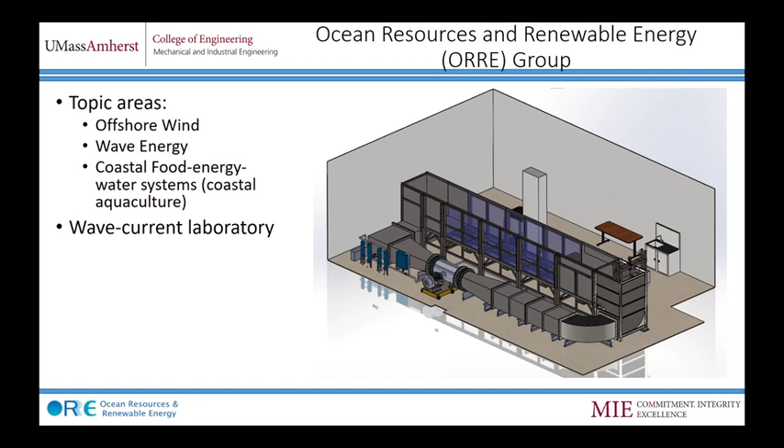A lot of my effort these days is in building this wave current laboratory, which is not as large as the Chase facility. It's about an 11-meter length facility, but we are very keen on developing a good understanding of waves and currents, and we see that as the next big challenge with marine hydrokinetic systems.

So that's kind of the layout, as you can see there's some dimensions there. It's about 1 meter by 1.2 meters wide, with an operating water depth of 1 meter. We want to equip it with photography and PIV systems, and we also have people on our team interested in numerical simulation.

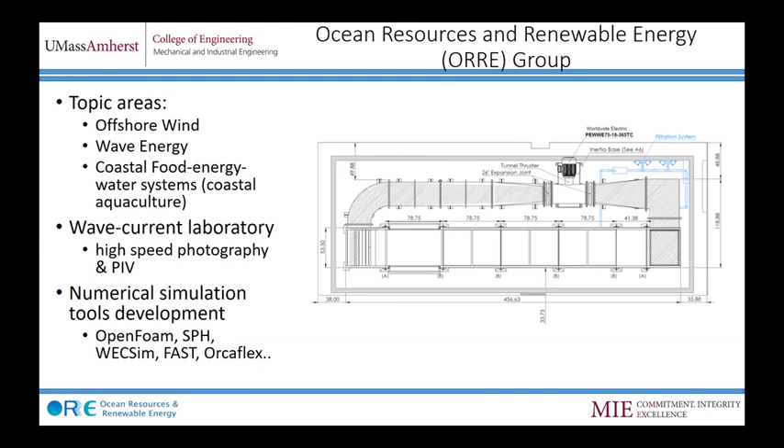So all of this we hope will come and support us in the three areas we're working on. Some of the topics we work on in offshore wind: our recent research has focused on how the platform behaves in the environment—what sort of loads, both wind loads and wave and hydrodynamic loads, are imposed on the platform, how to simulate these extreme environments, what flow-induced vibrations we might encounter, and of course mooring systems, which is a real thorny issue for the emerging floating offshore wind area.

Interestingly enough, even though I'm part of the Wind Energy Center there, most of my funded work is actually in wave energy. As you see here, some of our projects with the National Renewable Energy Labs involve this flap-type wave maker wave energy system, and we did some tests in Maine on this device.

The novelty of it is it has little shutters you can open and close, and the idea is you can shed loads during the most extreme conditions. Now we're working with NREL on a system that's not bottom-mounted but slightly lifted from the bottom, and as you can see in this picture, it's a little tower sitting on top of that. We hope to be able to test it in our new facility at UMass.

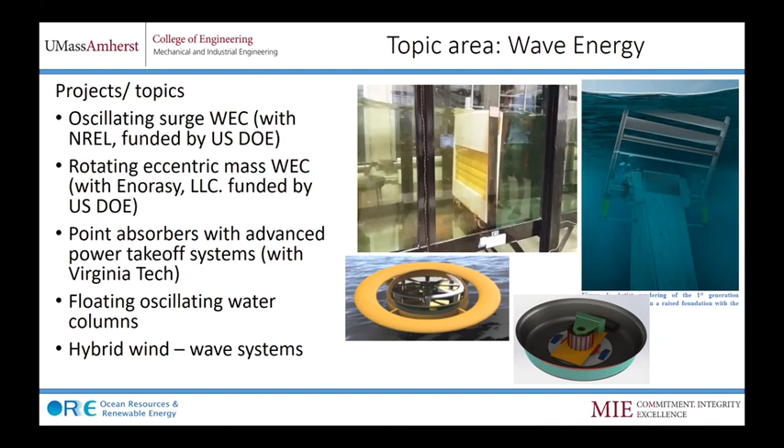We have also, in the past, worked with Virginia Tech on some of their point absorber ideas, and I have a personal interest in oscillating water columns, having worked with them since my time in Australia, recently looking at floating oscillating water column systems. There's also interest in seeing how hybrid wind and waves can come together—can wave energy and wind energy coexist, and if so, how can it be made economical?

The food, energy, water nexus and the aquaculture idea have very strong social implications. As many of you can understand, our engineering solutions these days should be socially sustainable—social engineering combined with technical engineering, if you will.

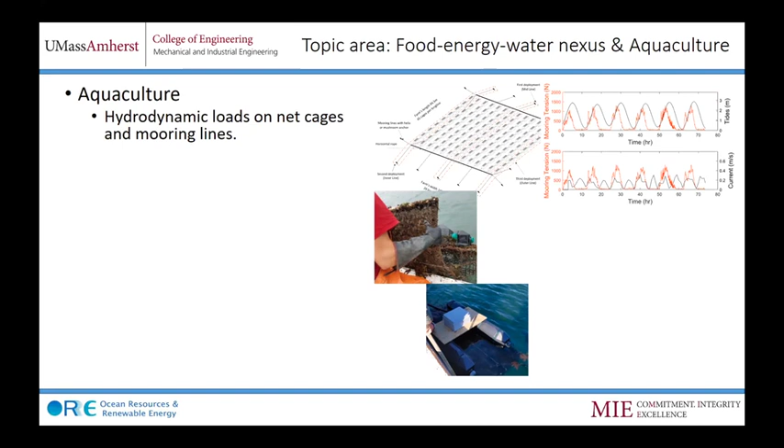So aquaculture systems have a very community-focused aspect to them. Our engineering is looking at how we can ensure safety of aquaculture infrastructure, and in particular we are interested in mooring systems and the ropes they use.

I have also extended support to the ARPA-E programs when they did the large-scale macroalgae production, and I know UNH is involved in it in a very big way in the Mariner projects.

We also have a student who was working on better prediction models using SPH, smoothed particle hydrodynamics. Let's see if I can get my mouse to work. Actually, like this one. Let's see if I can do this.

So these are SPH simulations of objects moving in water. The idea is to see if we can come up with better mooring line models that can also be integrated into this simulation. I'll touch upon this towards the end of the talk, on some of the viscoelastic and viscoplastic modeling of synthetic mooring lines and how we are working on developing that.

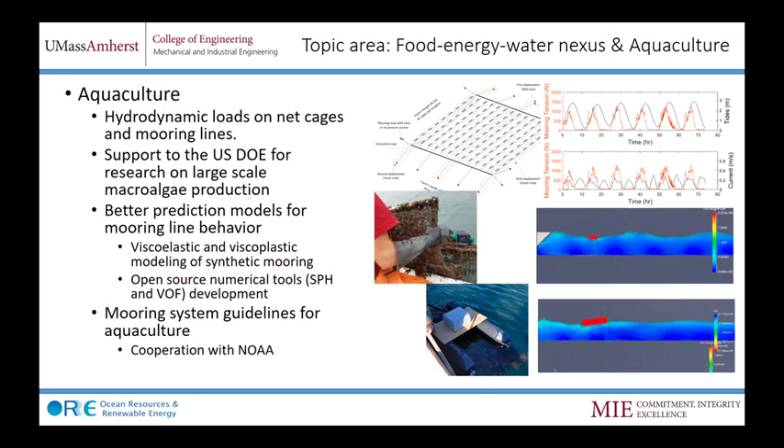Also did some supporting work for NOAA for their mooring system guideline development.

A couple of things I'll mention in the service area: I also contribute to the ASME's Ocean Offshore Arctic Engineering Conference, and I'm the coordinator of the Renewable Energy Symposium, the OMAE conference that happens every year. We also have a new conference on offshore wind, called the International Offshore Wind Technical Conference, and the next one, in 2020, is going to be in Boston, end of October this year. So an open invitation for anyone interested.

Okay, so I want to start. I have two parts, and I'm going to see how much justice I can do to both of these parts in the limited time. I'll start with part one, which is focused a little bit on the oil and gas side, but it also kind of leads you into what are the challenges we are facing with the floating offshore wind side.

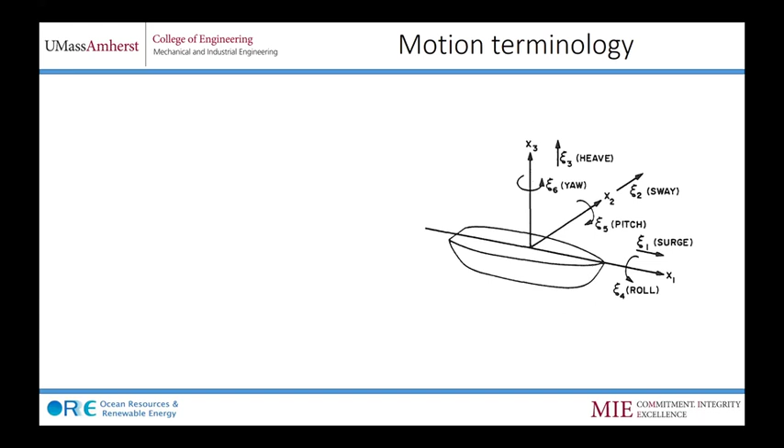Just to get everyone on the same page, when we talk about how moorings influence a platform motion, in conventional naval architecture we have the vertical plane motions: heave, pitch, and roll, and you can see how those motions come about in that diagram there. The vertical plane motions are called seakeeping motions in naval architecture, and in offshore engineering we call them global performance.

And then the other three motions are called the horizontal plane, which is surge, sway, and yaw. In ships which are moving forward, these become the maneuvering aspects and the maneuvering parts. And in moored systems, these are called the station keeping behavior or performance.

So conventionally we have separated these two motions because they are also segregated from a spectral standpoint. In terms of frequency, the range of frequencies, these two motions are separated — that's the way they occur naturally. And the mooring systems are primarily designed to work in the lower three motions.

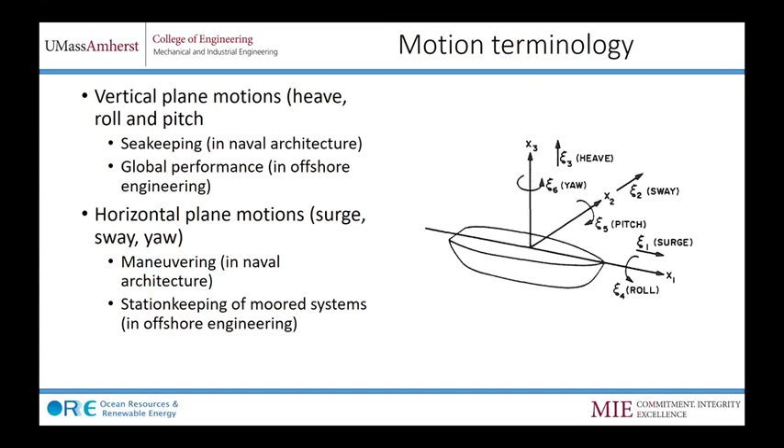And that kind of gives certain unique advantages. The principal advantage being the horizontal plane loads that are influencing a mooring system are much smaller in magnitude compared to the vertical plane loads. And so you can get away with a smaller mooring system, a thinner line, and make the system robust and ensure its station keeping ability. So let's keep that in mind, and then we'll see how the progressive use of mooring systems actually allows the moorings to move into all these motions, and that's where a lot of challenges arise.

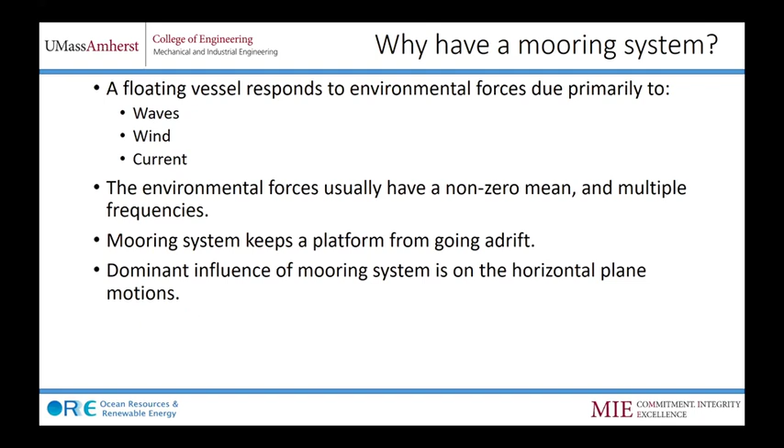So why even have a mooring system? We have all these mean forces hitting on a floating vessel, and if you do not have a mooring system, then the platform is going to keep moving. So the mooring system keeps the platform from going adrift, and the dominant influence is on the horizontal plane motions.

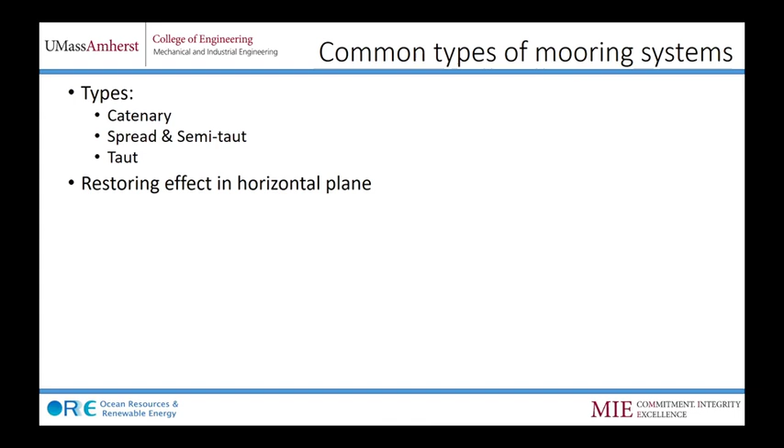So these are the three common types of mooring systems that we see in the industry: the catenary system, the spread system, and the taut system. In the catenary system, the way the restoring effect works is basically by a change in configuration, which is what gives you the restoring effect. But it's also quite heavy.

The spread mooring system is a combination of different types of material. This is an example of a polyester system used in an oil and gas installation. What we have is a chain at the top, and then you have a wire, which could be polyester, or it could be a synthetic rope or a wire, and then you have a chain at the bottom.

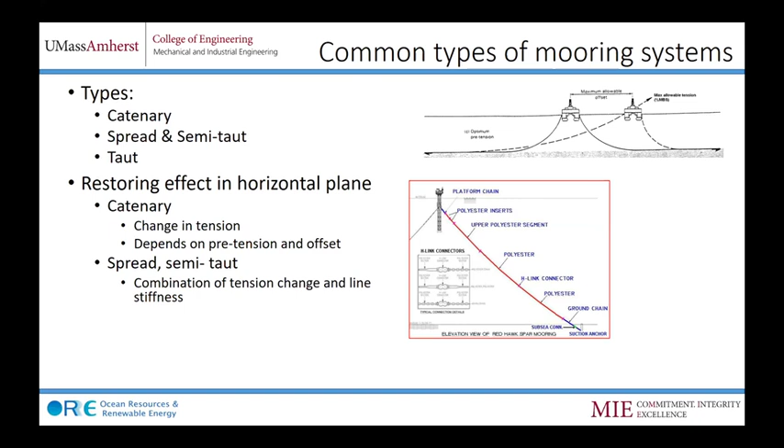So with the semi-taut system or the spread system, there is a combination of tension in the line and the line stiffness together — they provide the restoring effect.

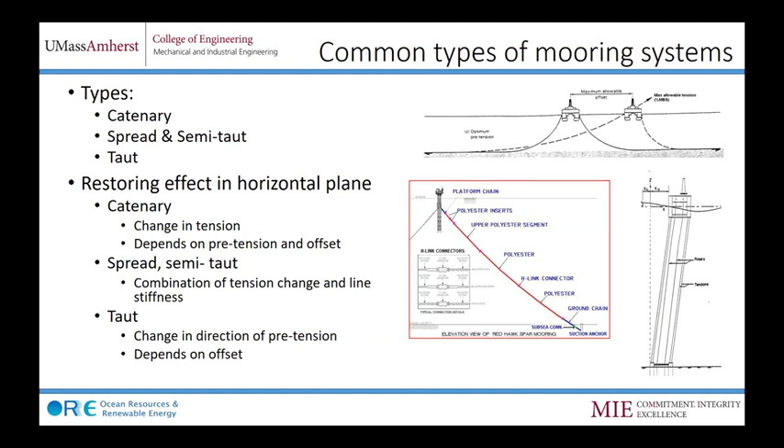In the case of a purely taut system, like the tethers of a tension leg platform, basically the platform moves, and it's the change in direction of the pretension in the line which provides the restoring effect. So when we move from the catenary system to this type of system, we have an uplifting effect on the anchoring system. You've got to come up with better anchoring and foundation arrangements for the semi-taut and taut systems. The foundation takes on a much bigger role, and becomes more expensive compared to the catenary system, where you can get away with a little drag anchor, which is one of the cheapest ways of doing it.

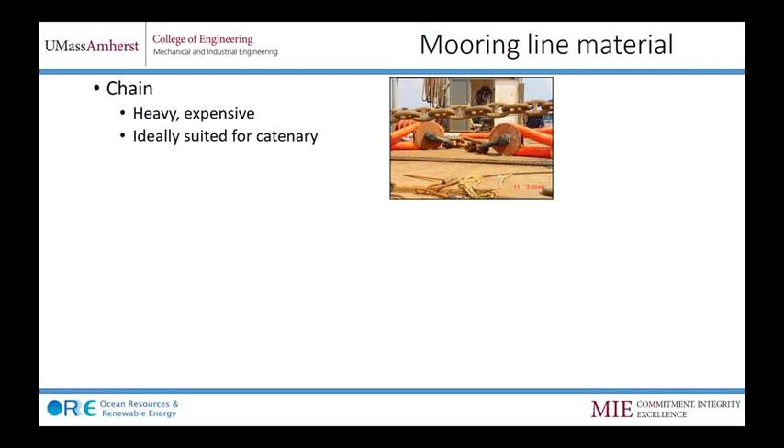In terms of mooring line material, chains are the most common and very traditional, with well laid out, commonly available handling systems. But they are heavy, and only ideally suited for the catenary type arrangement. Then you have the steel wire system, a stranded cable arrangement, or synthetic rope, which is a braided structure. What we're finding is the viscoelastic and viscoplastic nature of the synthetic rope can make a big difference in the way the rope behaves.

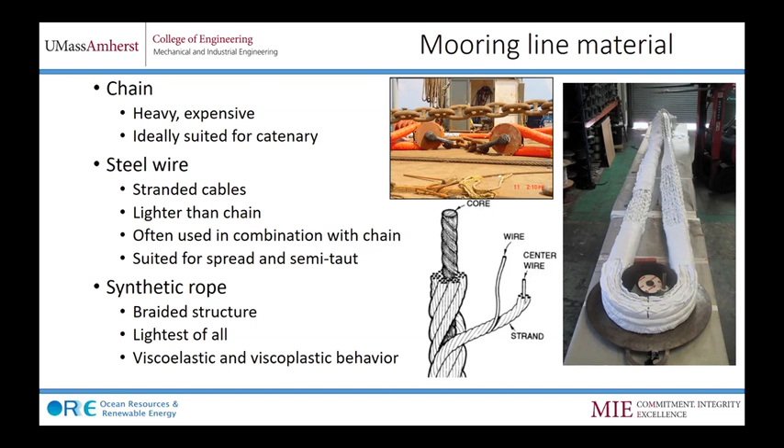I want to initially talk about a very interesting problem, research we did over the past 10, 15 years, looking at the station keeping of a turret moored FPSO, a floating production, storage, and offloading system. Here, the mooring line is a very conventional arrangement where we know how the system works, and it's basically in the station keeping domain. You will see no influence of the sea keeping aspects, the vertical plane aspects. And here we came across a very interesting instability problem, which I'll show some slides on.

For those who are not aware, FPSOs are, as the name implies, remotely operated production systems where whatever is produced is processed on board the vessel, and the hull has a number of tanks where the produced fluids are stored and offloaded every few days when a shuttle tanker comes in. Many of these vessels have an internal turret arrangement, something like what you see in the picture here, and all the mooring lines attach into the turret. So the vessel itself can freely weather vane about this single point arrangement. In offshore Australia, there are a number of these vessels because the fields are a little remote, and having pipelines to bring the produced fluid to shore is simply not possible. So having FPSOs is really a very economical option.

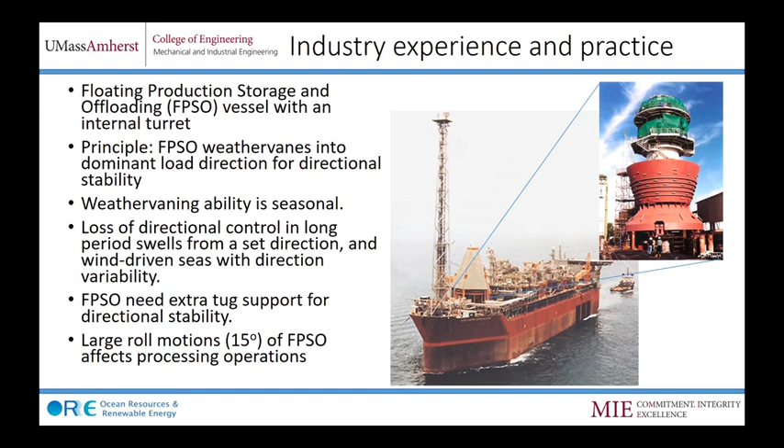But what we found, from anecdotal evidence from operators, is the vessel very rarely stays in the weather vaning position. If there is head sea coming in, the vessel is supposed to align itself in the direction of the waves. But instead, when the sea turns direction, the vessel will simply turn itself so that it's always aligned - at least that's the idea. But what people found was oftentimes FPSOs need extra tug support because it seems to align itself at an angle with respect to the oncoming waves, resulting in very large roll motions, consequently affecting processing operations and so on. So we did a research project in good collaboration with the Institute of Ocean Technology in St. John's, Newfoundland, Canada.

While the video is running, I'll talk about this experiment we did. We built a model FPSO, basically a converted VLCC, and put mooring lines at a turret. We put a turret in there, a turntable, put some mooring lines, and then wanted to first test it in regular waves, just to understand its response amplitude behavior. Surprisingly, what we found is what you're going to see in the video.

We later tested it in random waves. There were no winds, no currents. We had 4 mooring lines, instrumented them, and you can see something happening. The waves are coming from right to left, and the vessel is not aligning itself in the direction of the waves. It's invariably turning, and it seemed to be very comfortably located at some angle. In this particular case, the angle is about 35 degrees with respect to the oncoming waves. So clearly, it's taking waves beam on or in a quartering condition, resulting in roll motions, creating all sorts of interesting complications. It also complicated our experiments because if the vessel would not stay in one place, we cannot get the response behavior, because the response depends on the angle.

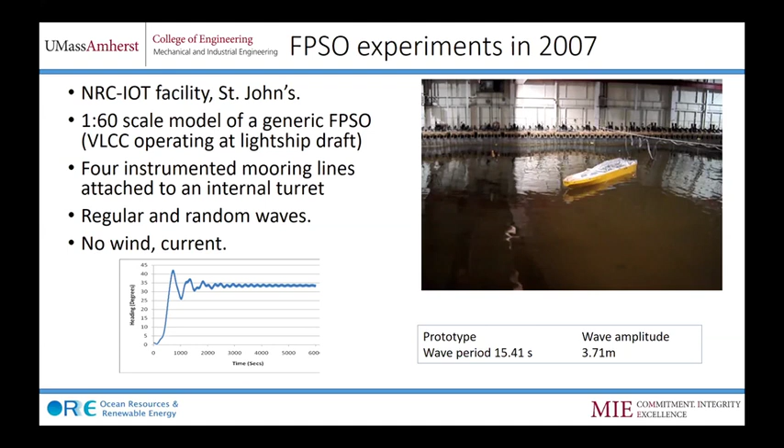So we set about trying to understand why this is happening, and then we came across this. We started hypothesizing, and then what we saw was this heading instability, and this is directly a consequence of two types of drift loads. These are small forces from the waves happening at the station keeping range, very low frequency, with mean loads creating a low frequency motion.

So these are just mean forces and non-linear mean forces. One of them creates a moment about the turret, another a mean force acting on the hull, and these two have counteracting moments. The angle at which the hull settles is simply given by the point where these moments come to equilibrium, and the moment obviously depends on the angle at which the hull is located.

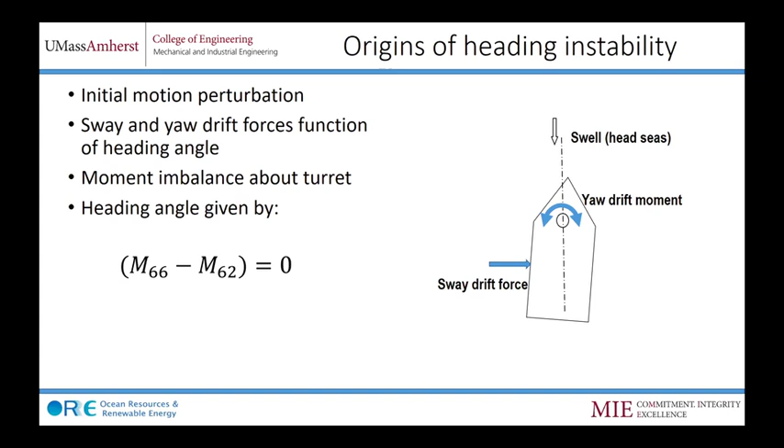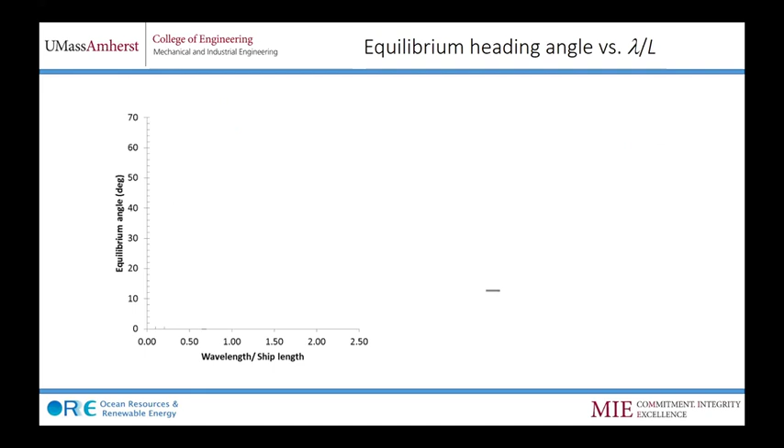So we also did some numerical simulation of this work. It turned out to be a PhD thesis of one of my students. And what we found is if you look at how the equilibrium angle in the y-axis changes with the frequency or the wavelength of the waves, we found something very interesting.

Up to a certain point, we don't see any changes. The equilibrium angle is 0, which is what we want - we want the hull facing the waves, so that's zero equilibrium. At a certain wavelength, when the wavelength to ship length ratio is around 0.5 or so, the experimental data showed this equilibrium angle was changing, and like what we saw in the video, the equilibrium angle was around 30 to 35 degrees. It started changing up to a certain wavelength, then it flattened out, and then it reduced.

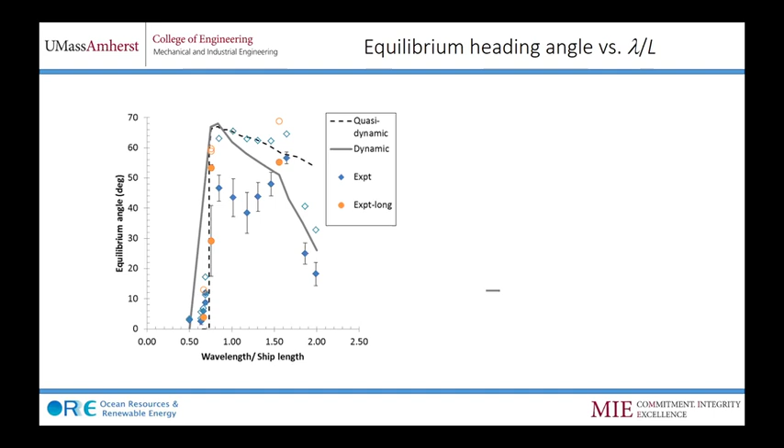We saw the same thing when we did our numerical simulations. We did both frequency domain analysis and time domain analysis, and our curves also predicted very similar behavior to what we saw in the experiment. So in one of our papers, we talk about a bifurcation in the equilibrium that results in this behavior, and we studied how this happens and why it happens, and so on.

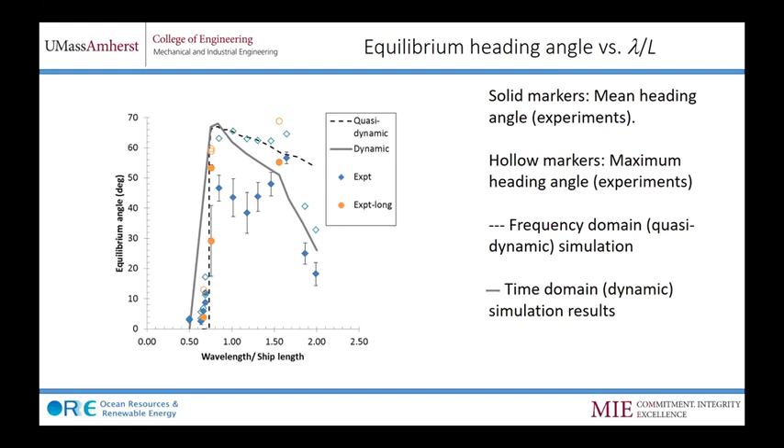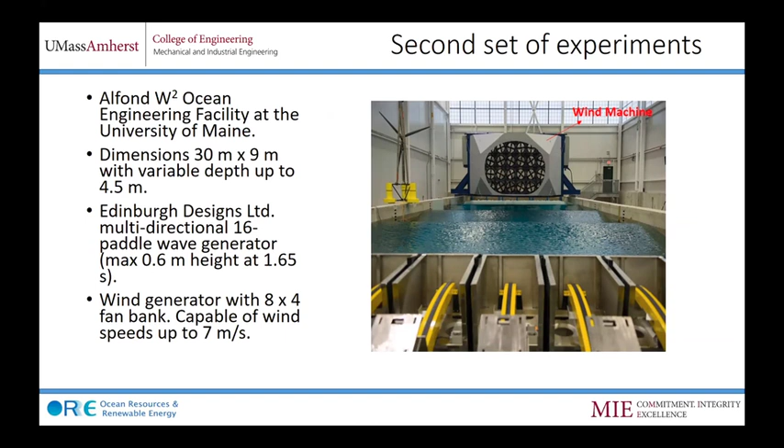So when I moved to Maine, we looked at doing another set of experiments with a similar FPSO model. I helped build a facility at the University of Maine, which is this wind wave facility. The wave tank is about 30 meters long, 9 meters wide, 4.5 meters water depth. We had wave makers on one side and a beach on the other end, and we had this wind machine, capable of producing quite large wind speeds.

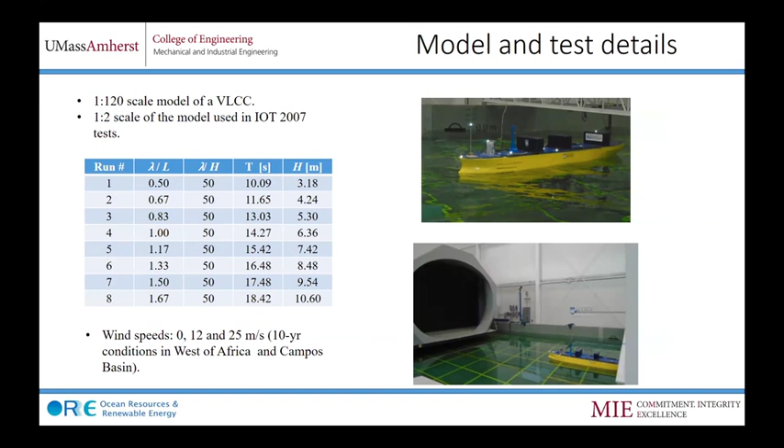We built a little FPSO model, a replica of what we tested in Canada several years back, and subjected it to multiple environmental conditions, including regular waves with wind speeds, as well as bidirectional waves. What we found was very reinforcing of what we saw in Canada. We used very similar mooring systems - lines with springs that matched the reaction force or stiffness from the actual mooring system. We have a little turntable turret for the hull.

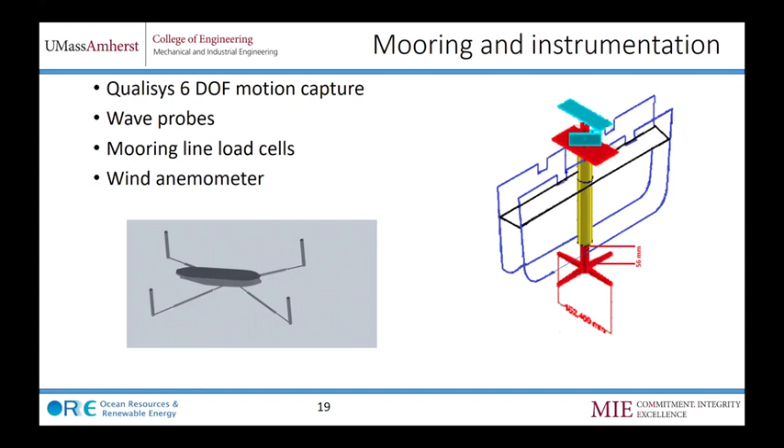What we found in that case is the heading angle versus the wavelength to ship length ratio had a very similar behavior to what we saw in Canada. The no-wind case matched with the experiments from before, and when we added wind speeds, this heading angle also changed. Presumably the wind speed adds another moment to the equilibrium, and consequently that affects it. All this was published in a couple of papers.

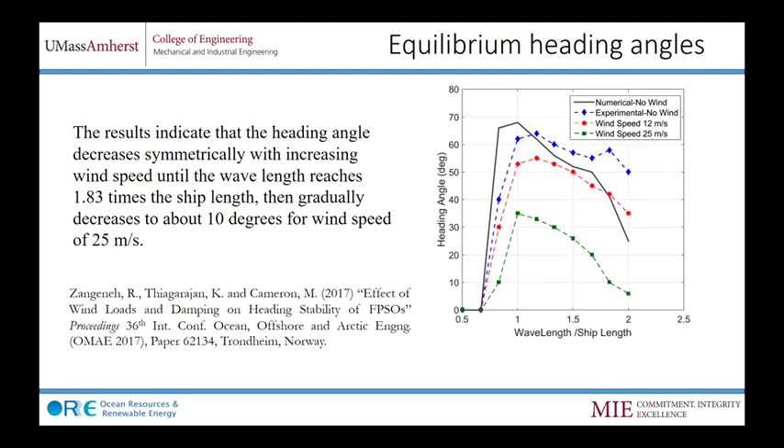Then we posed the question: what would happen if an FPSO like this were to be in an environmental condition which has both waves and swell? So it's a bidirectional sea state, very commonly seen around the world. In Australia, they have swells coming from the Southern Ocean interacting with the wind sea, which is a local phenomenon. You see this sort of bidirectional condition in Brazil as well.

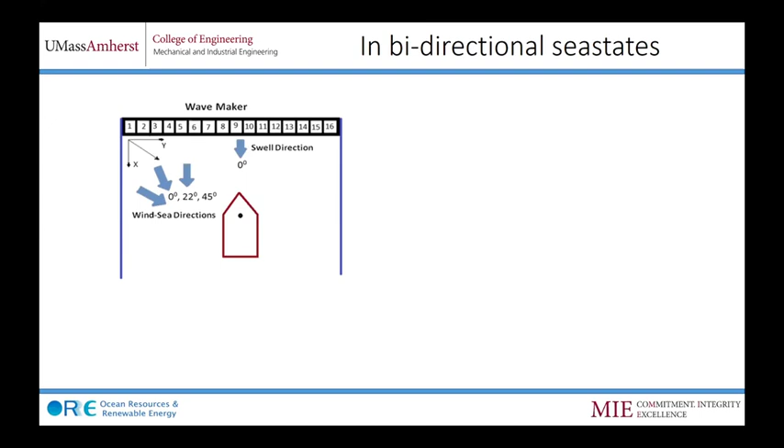Bidirectionality is defined as when the swell, which is more predictable, comes from a certain direction, and then the wind sea, which is a locally generated condition, can change direction relative to the swell. So we assumed our FPSO is operating in one of these conditions, oriented in the direction of swell, and then when the wind sea is applied, what sort of movement will this platform have? Will it weather vane in the swell direction, or change towards the wind sea, or what will it do? And what we found was something very interesting.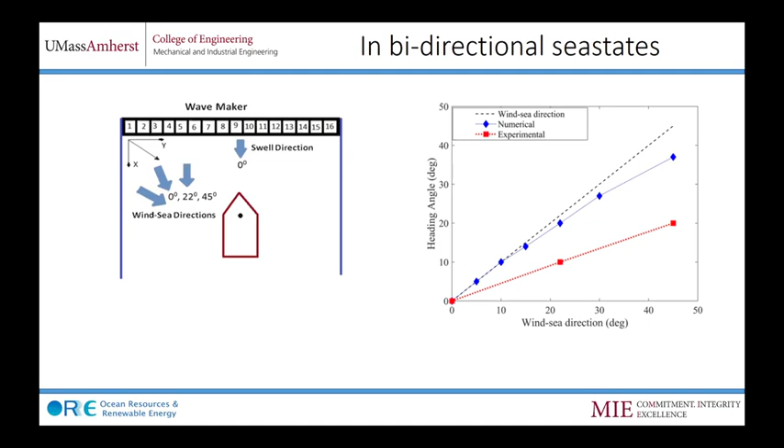So it's in between the swell and the wind sea, kind of aligning itself somewhere there. Whereas our numerical simulations showed that the vessel should orient itself in the direction of the wind sea. So there was clearly a very large discrepancy between what we are seeing in the numerical simulations versus what we are seeing in the experiments.

And then we said, okay, what can we do? What we started understanding was, when you have two wave systems coming in two different directions, you have the wave numbers of these two, and wave number is a vector, right? So you look at the difference between the two vectors as well.

The second order potential of this combined wave system creates something called a bound wave. And this bound wave actually has a wave number which exactly matches this difference vector between the two wave number vectors. So when we do simulation with bidirectional sea states, we don't just input the two sea states, we actually have to input a third component of the sea state, which is this bound wave.

Previously, when we did simulation, we only had the swell and the sea. That's typical of simulations we would do in the industry. Now, what's often ignored is this component, the bound wave given by the difference between these two.

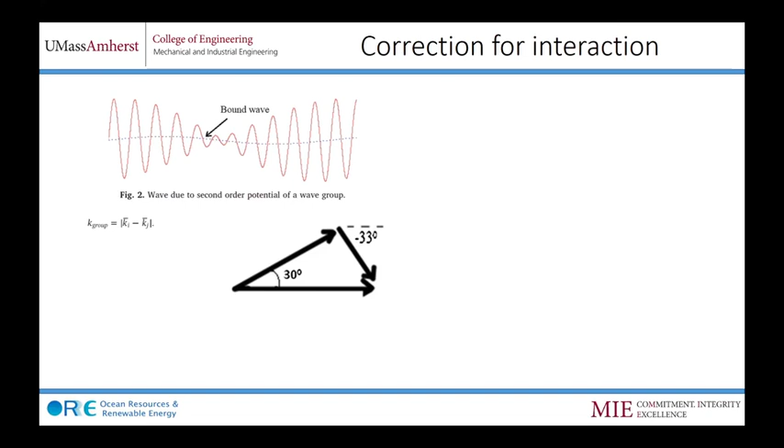So once we add this third component and then do our simulation, what we find is, lo and behold, our simulations match very well with the experiment. If you need more details, you can look at our paper in Applied Ocean Research from 2018.

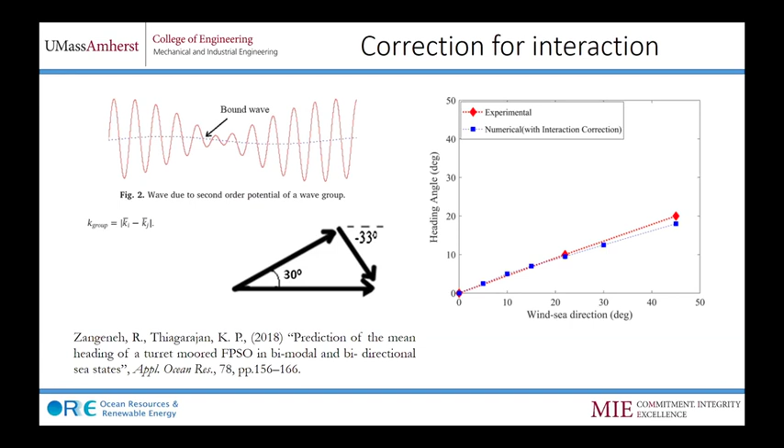So in part one of my talk, what I've shown is how the conventional mooring system has been designed, deployed, tested, and how it contributed mainly to the horizontal plane motions. And what we were talking about is yaw motion, yaw instability, and equilibrium of a vessel in yaw motion.

Now, what we have been seeing in the industry is, as we have progressively been moving into more challenging mooring arrangements, we are finding more and more failures in the mooring systems.

Recently I've been looking at some literature where people have documented failures among floating installations in the Gulf of Mexico. There's been quite a few among the reported failures, some of them requiring a shutdown of the installation and of the production.

It results in a very high probability of failure, an annual probability of around 0.3%, which is quite considerable and significant. So when you do mooring designs, you really think about a very low probability of failure, and having large reported failures kind of results in people thinking whether the standards, guidelines, and design practice we have are adequate enough.

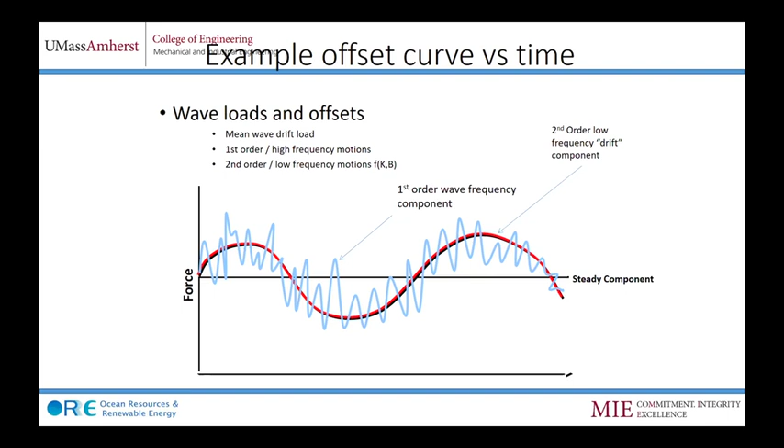But when we get into floating offshore wind turbines, we are moving into shallower waters. The platforms have lighter displacement. That results in some complications. And we are also customizing technology quite rapidly, which is a social aspect of this problem.

What we together see is mooring is affected by wave frequency. And so when the mooring is also moving and the platform is moving, you could end up at points where something called a slack-snap phenomena occurs, which is basically a shock load that can also transmit. So mooring lines are now affected not only by wave frequency motions, we can also see shock loads that could occur in these mooring lines when applied to offshore wind turbines.

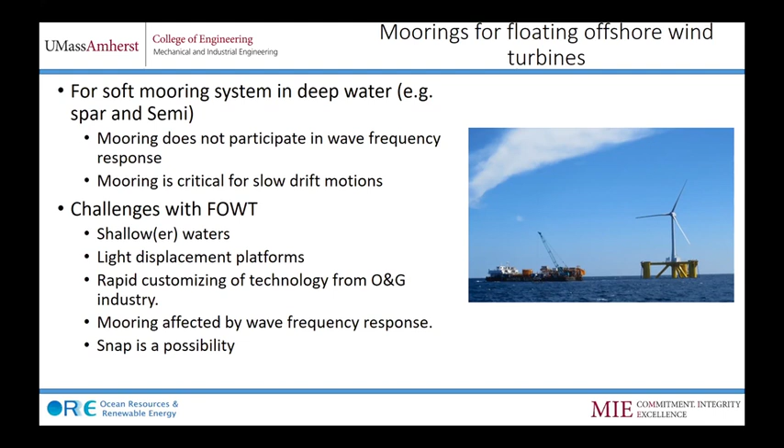To investigate whether this is true, we resorted to an experimental data set, which was a DOE-funded research program conducted by the University of Maine and a consortium. They tested three generic platforms: a spar, a 3-column semi-submersible, and a tension leg platform, all carrying the same wind turbine. This was tested at the Marin facility in the Netherlands.

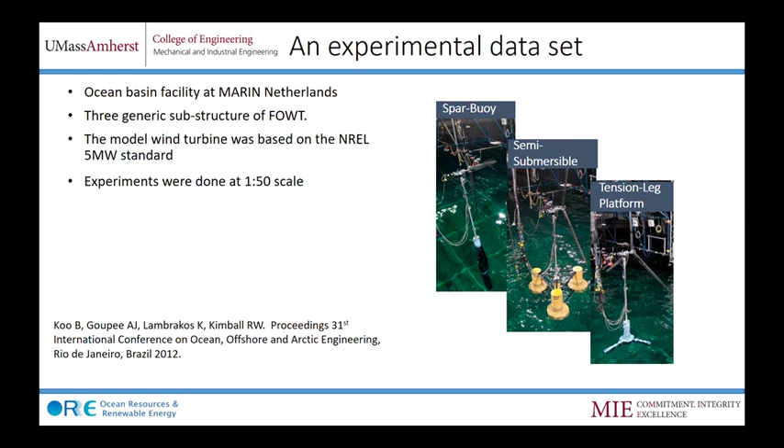So it's a 1/50th scale experiment, and a number of papers have been published on this data set. What we did is take the data for the semi-submersible, and we were looking at the 3 mooring lines for the semi, and we wanted to see what sort of tension variation we get. What you see here is a numerical simulation in Orcaflex, but what I'm going to show you in this talk is basically experimental data sets.

In the experiments, they had mooring lines, which are basically steel wires with little springs at the end to get the right tension-offset curve to match with the prototype. This wasn't in very shallow water - it was quite deep, like 200 meters is the kind of target water depth for that set of experiments. But even in this case, I will show you there are some very interesting mooring dynamics issues.

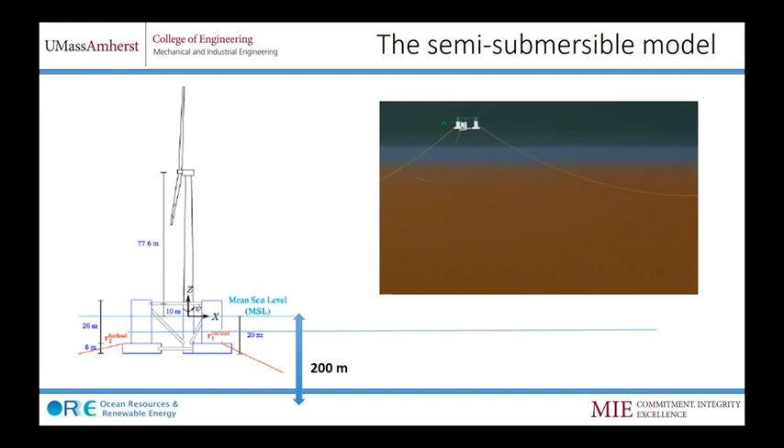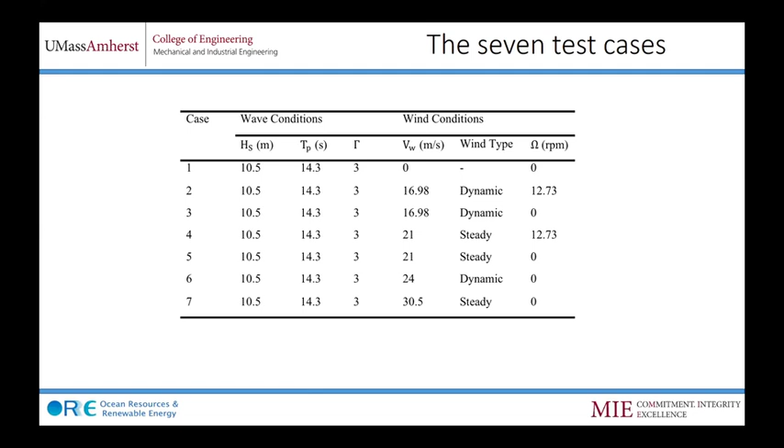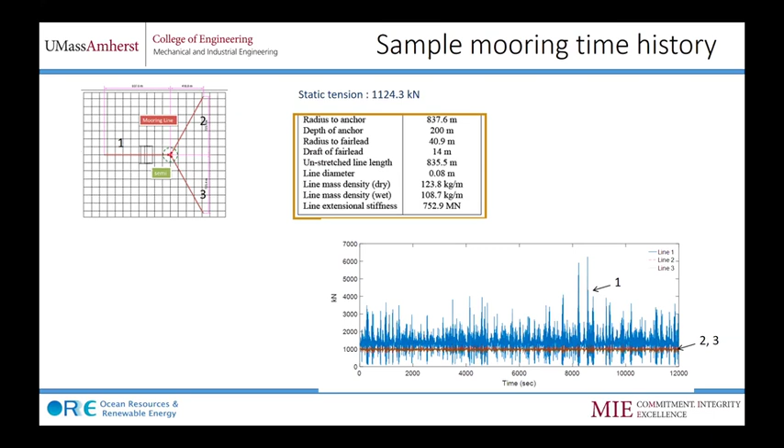What we find is the downstream lines have a tension which is very close to the static tension, the pre-tension value. But you see in line number 1, which is the upstream line, it encounters quite significant movements in its tension, and in some cases quite sharp, very large peaks in the tension.

So we took the data for line number 1, and then we analyzed it to see if any of them might be what are called snap loads. Snap loads occur when a line momentarily goes slack and then it picks up. It's very similar to how at home we would break a piece of rope - you just slacken the rope, and then you pull it tight, the rope splits, and that's a much easier way to break the rope.

And the same thing happens in some of these mooring lines. What we saw in line number 1 is the line goes slack at several points, or very close to being slack - a 10% allowance is given. So 0 is the slack condition, and there is 10% of the pre-tension value, which is the red line. So we are very close to being totally slack, and then we see that the line picks up rapidly and gets into a very large, very spiky tension value.

So we looked at every one of these oscillating cycles, and then we categorized them into snap conditions and non-snap conditions. A non-snap condition is where the minimum tension does not get very close to 0.

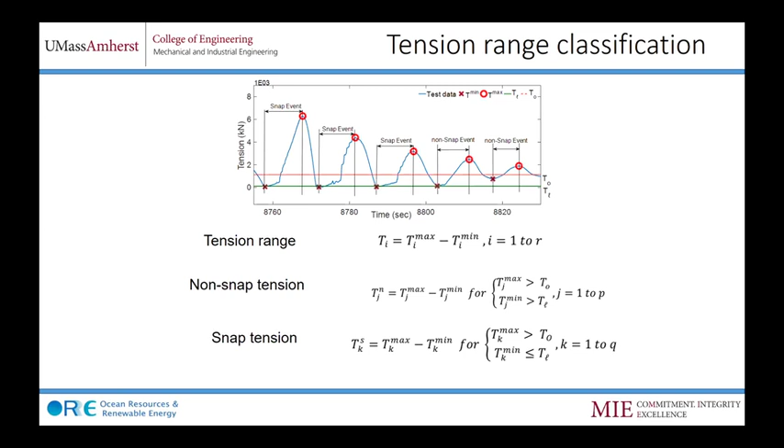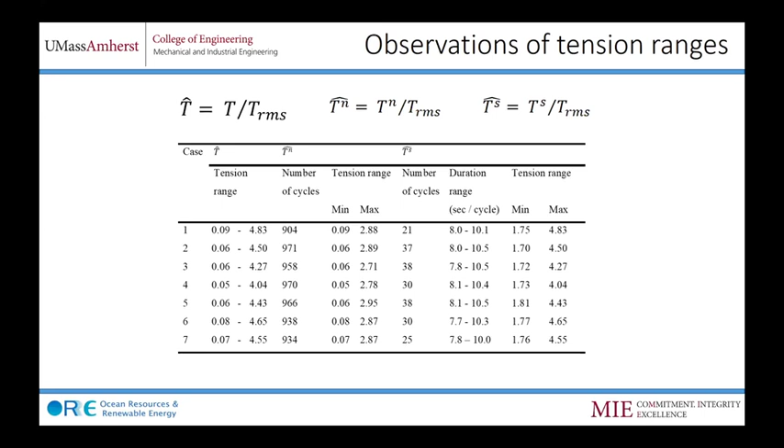So we asked: what does this all mean? Can this be ignored, like it's currently being done? Or is there something else we can do?

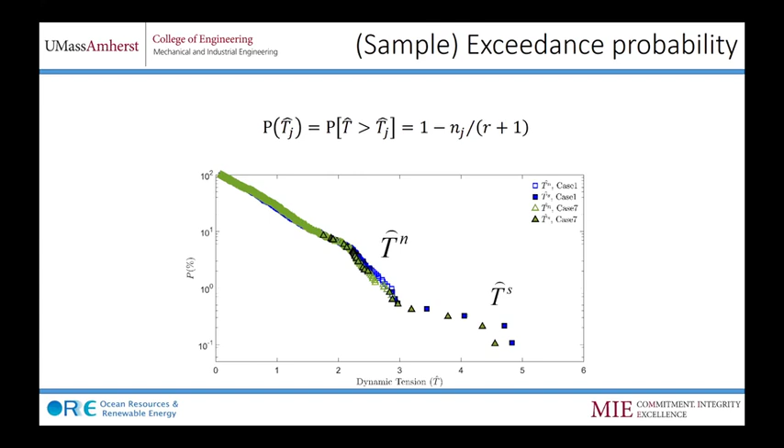So we used the usual maximum likelihood estimate, and what we found was that we are considerably underpredicting the probability of extreme values. So we asked, can we somehow fix it?

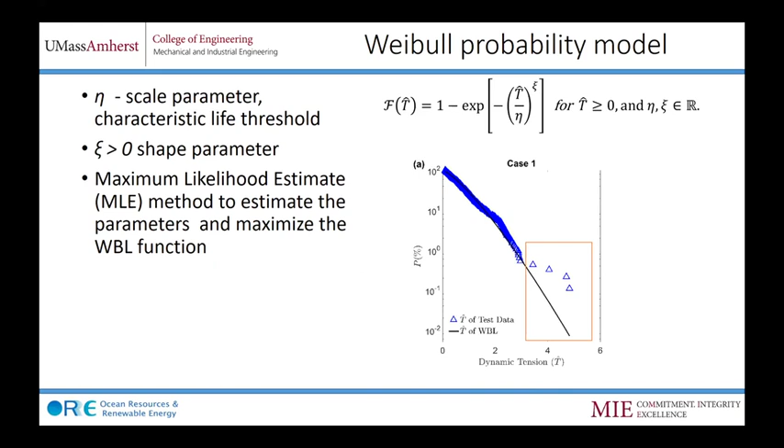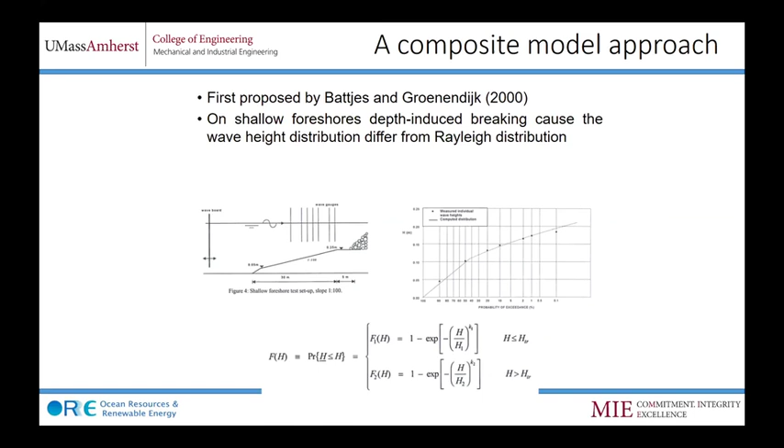We resorted to some of the models actually proposed for wave breaking, looking at wave heights before and after breaking. There are some papers describing what's called a composite curve, with one set of parameters for the curve before breaking and another for after breaking. So we asked, can we do something similar?

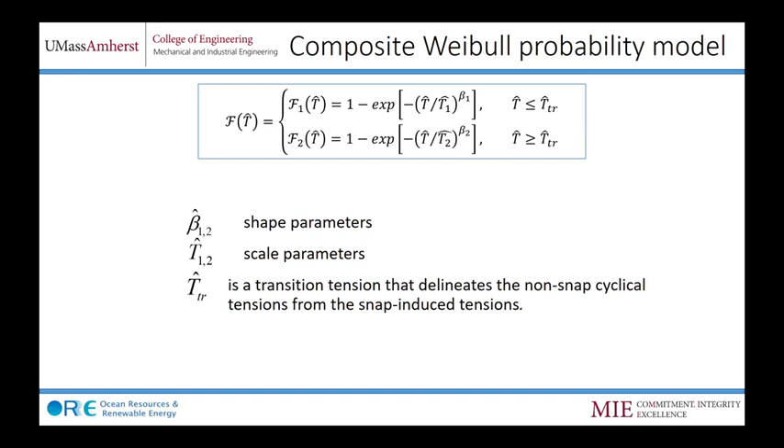We proposed a composite Weibull model, with one set of parameters before a critical tension and another set after it. What is that critical tension? It's a transition point that goes from the non-snap to the snap event. How do we characterize this transition?

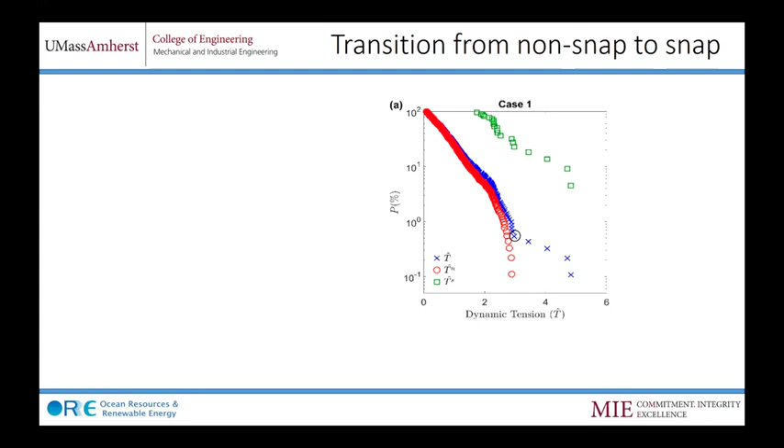That became pretty obvious when we looked at this curve, segregating the non-snap data, shown in red, from the snap data, shown in green. The blue data represents the total of all tension measurements. We clearly see that the point where the non-snap data deviates from the blue total data curve could easily be designated as the transition point.

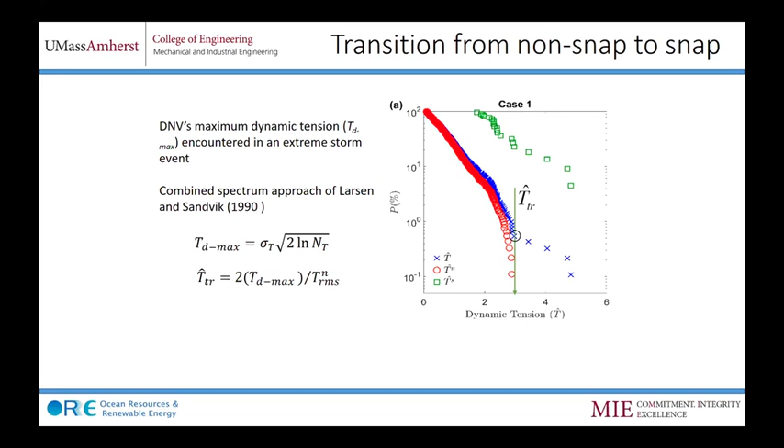So we asked, can we take our standard Weibull curve and predict the maximum tension based on the data sets we had, then define the transition tension simply based on the maximum tension from the Weibull curve? That's all we did - take the maximum tension and normalize it to suit our notation and convention here.

Once we do that, we find our composite distribution has a Weibull curve up to this point, then a little kink, and then a second Weibull which seems to capture the way this snap loading has happened. This was actually presented in a Marine Structures paper from a couple of years ago.

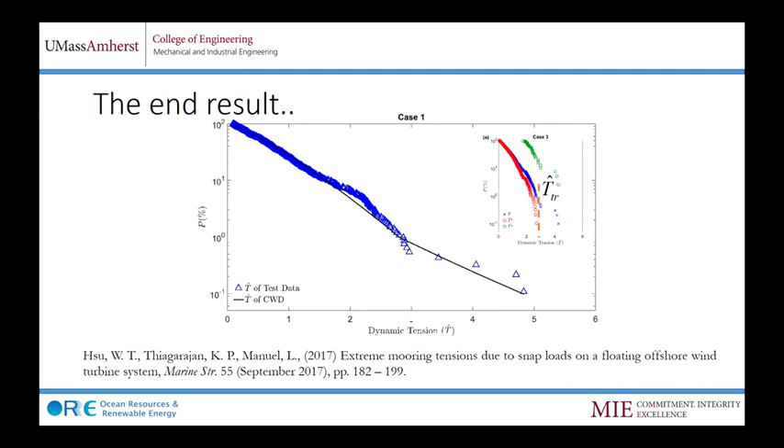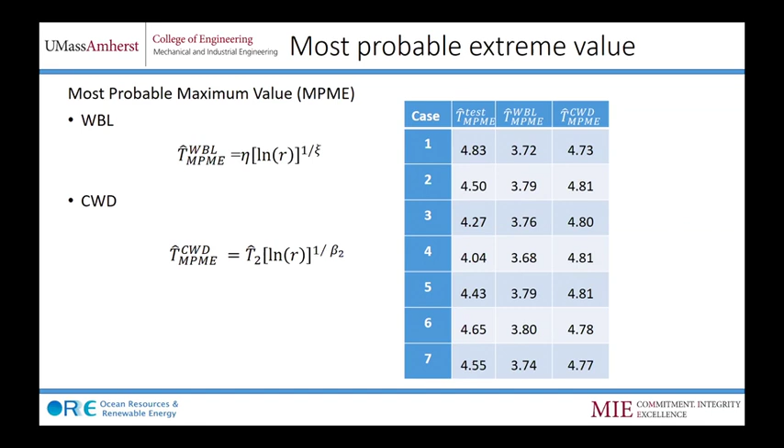What's very interesting is, can we make some sense out of it? We can look at the most probable maximum value of the tension. If we just use the Weibull curve without any correction for the snap, we find the Weibull predictions are quite a bit lower than the composite Weibull prediction, which gives results very close to what we saw in the experiment.

If you translate that into a safety factor principle, DNV's formula for predicting tension and safety in a mooring line uses the mean tension and the dynamic tension, each with a partial safety factor, gamma mean and gamma dynamic. All of this combined should be less than a characteristic strength of the rope, which is very close to the minimum breaking strength.

When we include our composite Weibull and calculate the safety factor, we find that the tensions are actually higher compared to what DNV is using - this ratio is about 2.7. So if you're using the traditional design approach and ignoring the snap, you simply have to accommodate this increase in tension in the safety factor.

Our conclusion was that the safety factor for dynamic tension could easily be increased by 2 to 3 times in some of these novel applications. My student, Wei-Ting Hsu, took this one step further, looking at it from a numerical analysis standpoint, and tried to predict the tensions using the well-known software, OrcaFlex.

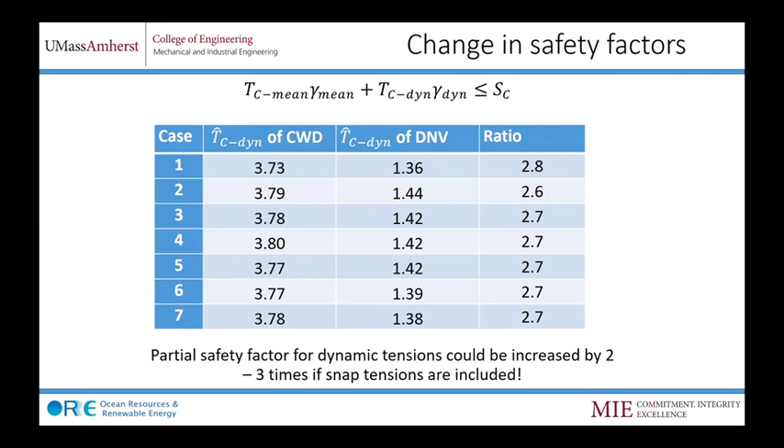So it was an open-ended question, and that brought us to our current work on synthetic lines. I see I'm close to running out of time, so I'll quickly run through what we are doing here and how it relates to what I just showed you.

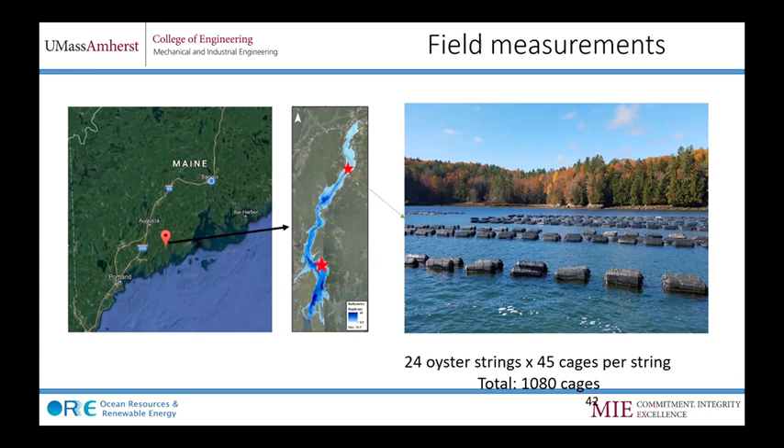This is aquaculture. We worked with a couple of aquaculture farmers in Maine. This is an oyster farm, and we instrumented a bunch of lines in it. We instrumented some of the mooring lines and measured the tension in the lines, and we also measured the tidal variations and the environment.

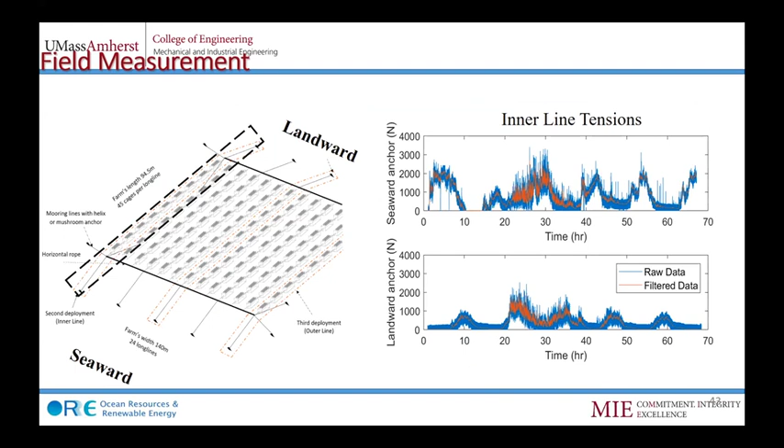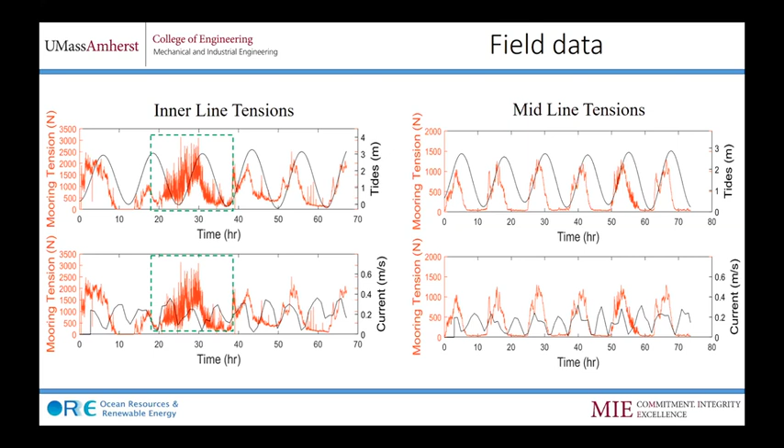It's very apparent in the top right figure what you see there is the mooring line tension. It has a large range, kind of a very slack condition, and so it doesn't follow the tide exactly. In fact, it has a tendency to drop off rather rapidly while the tide is still slowing down, and that was very interesting to us.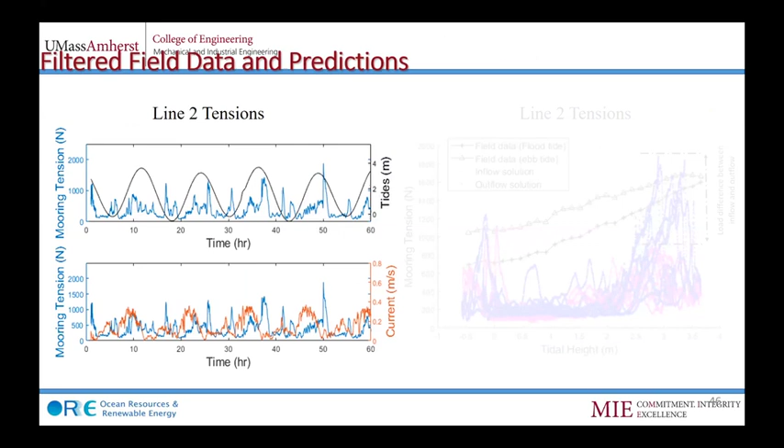This became even more apparent when we also instrumented a long line system, also in the same neighborhood. We instrumented a couple of the long lines which carried kelp growing at that time. And what we found, I'll skip this figure and show you this one.

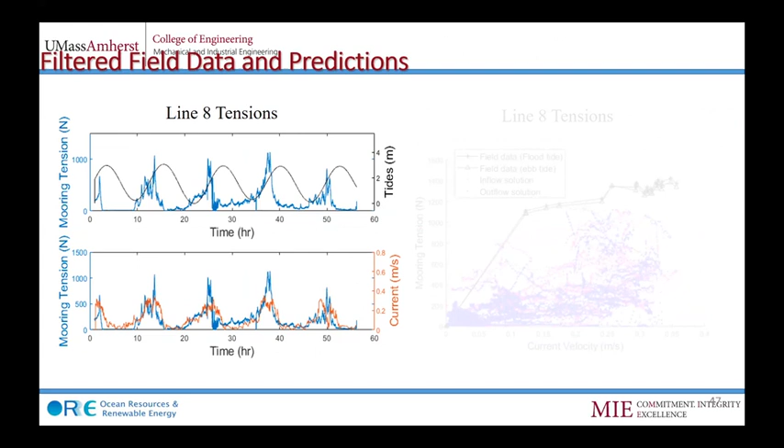Here you can see also the line tension, shown by the blue line at the top, has this tendency to drop off suddenly while the tide is still changing. The tension is actually well aligned with the currents, but you can see there is this sudden drop. We believe that's due to the viscoelastic and viscoplastic nature of the synthetic lines.

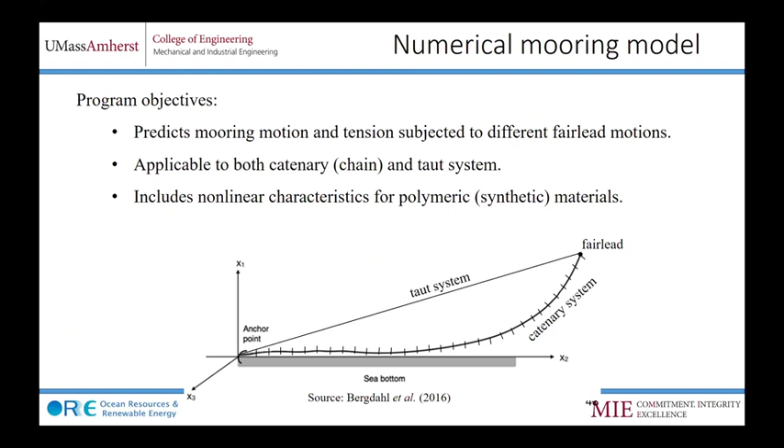I'm going to skip this and show you this. Right now what we are looking at is a nonlinear model for the mooring system, which comprises viscoelastic and viscoplastic constitutive equations that are both time dependent. Some of them are recoverable, the elastic nature, which is what we saw in the orange and blue curves, but the viscoplastic is of course a permanent, non-recoverable deformation.

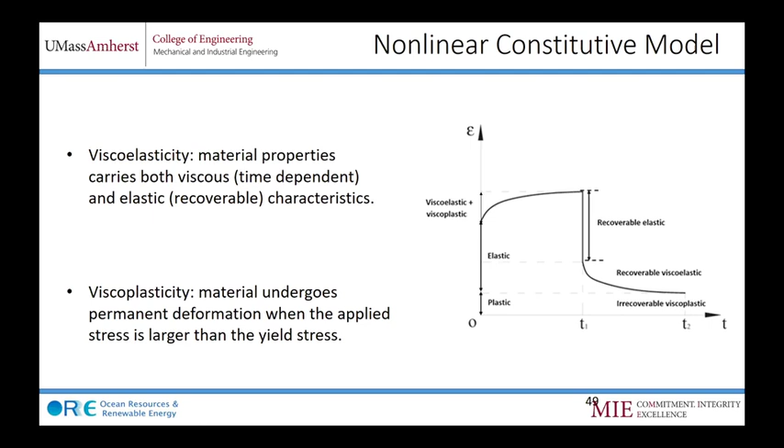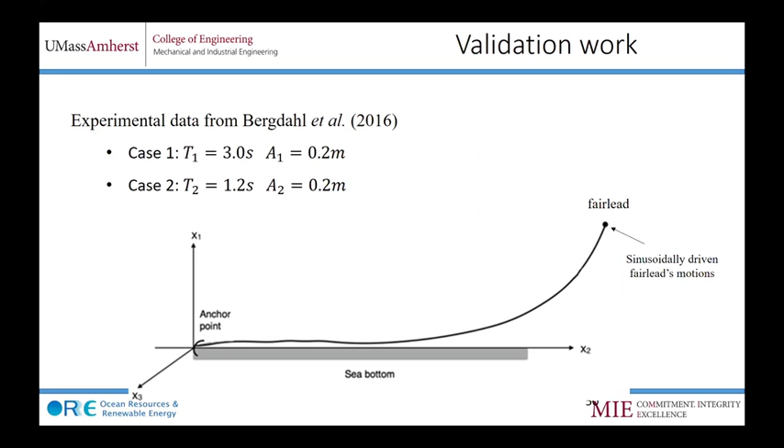We have currently completed a validation work of a mooring line simulation model. As you can see here, there is a line connecting a fairlead to an anchor, and there is some measured data for that line. Our simulation result, shown in red, matches the tension as measured quite well, which actually shows the viscoelastic behavior in between all these rises and falls.

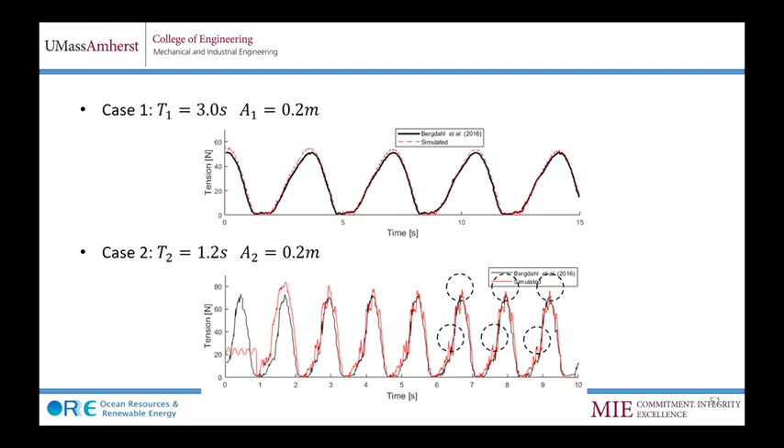We can also capture the hysteresis loops, which is when you load the line and you unload the line, you see very different stress lines. So we can take all these and look at how the stress translates into strain, how the line gets slack because of the extended strain, and how it can combine together when you have sudden rapid changes, like wave loads and a slack followed by a sudden snap condition.

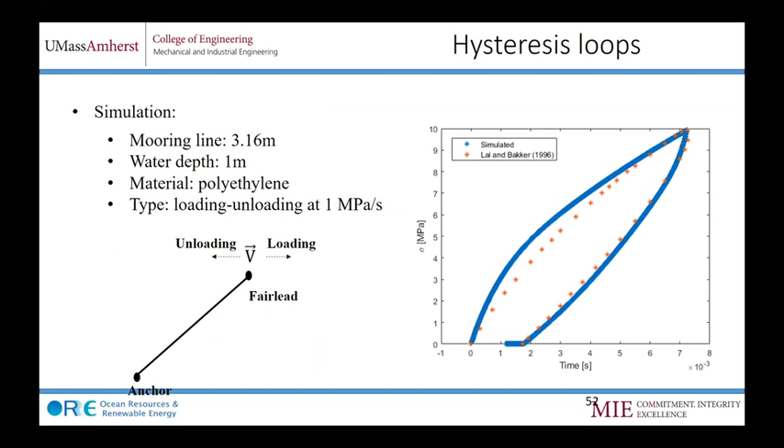So our current work, which is my last slide, is how we can integrate this viscoelastic and viscoplastic models into a CFD and numerical simulation prediction tools. And we are currently working on getting some experimental data and validation.

So, rather rushed, but I hope I gave you an idea of how the mooring line kind of runs as a common thread, no pun intended, across all these areas we are working on, and how many of these concepts you can really move from one area to the other, whether it's oil and gas, wind, or aquaculture systems. Thank you.